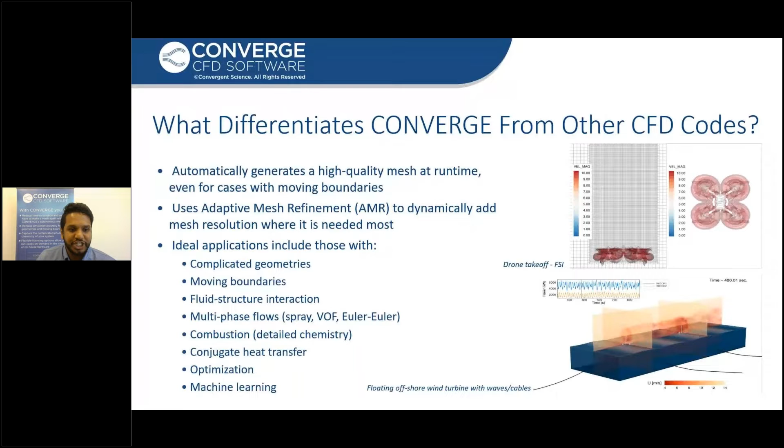This is typically the workflow that you would encounter in some of the traditional CFD codes out there. You would import your geometry, and before you can really focus on the physics of the problem, you would have that bottleneck of meshing, either through a mesher or even using another software for meshing. And that is what we offer to get you around in CONVERGE. So you would simply import the geometry, and with automatic mesh generation, you can have more time to focus on the physics of the problem.

So how can this help you? Well, you can avoid long meshing times. You don't have to mesh by guessing anymore. That's what AMR is really there to help you with. With AMR, you can simply have mesh applied where the flow gradients are most varied.

If you want to do a grid convergence study in CONVERGE through the Cartesian cut-cell method, you can simply change the base grid, as we call it, and have a new mesh generated, which makes grid convergence studies much easier. And also, we have a higher quality mesh through the orthogonal cells that we use.

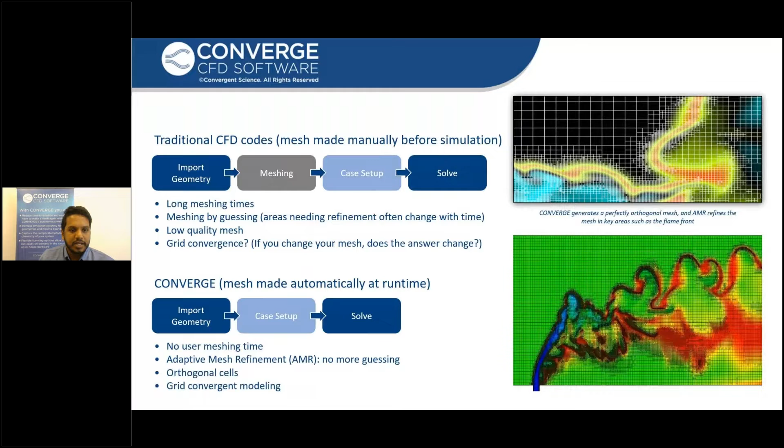So that's an overview of CONVERGE, but for this webinar specifically, we wanted to focus on some case studies that we encounter in the oil and gas offshore market. Firstly, multi-phase. Multi-phase flows are something we encounter daily in the oil and gas market. Whether it be upstream, midstream, or downstream, there's always a multi-phase application of interest. You're going to hear a little bit about the multi-fluid multi-phase model, and also applications such as the three-phase oil separator and the fluidized bed reactor.

Another is going to be the floating offshore wind platform and some of the models we have specifically for that. We're going to look at the OC6 validation effort, a case that we simulated in this area. Pumps and compressors is an area we've been in for the last decade, and we're going to look at one specific case of a pump where fluid structure interaction and automatic mesh generation really come into play. Erosion modeling is what we're going to look at finally, with cases in erosion in pipe flow and drill bit modeling.

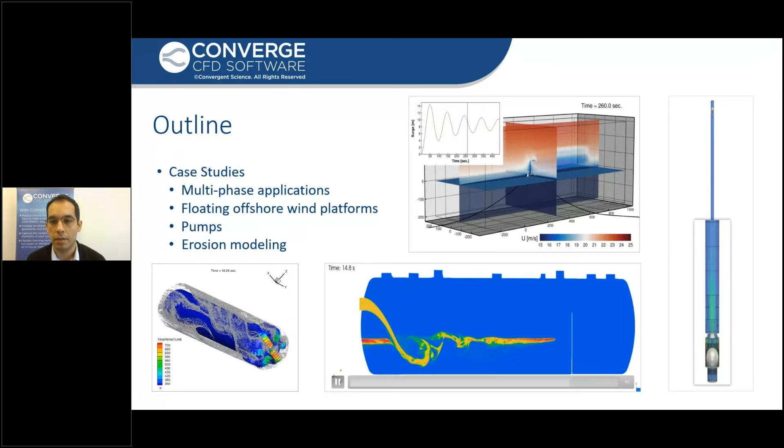In this webinar, we'll be discussing some main features that can be useful in oil and gas applications. The first part of this webinar is about the Eulerian multi-phase models that we have in CONVERGE CFD. There are many other industries interested in this type of problem. For example, technology, aerospace, automotive, and even biomedical industries are among them.

The figure here shows how Eulerian and Lagrangian approaches are different. As we may know, in Eulerian approaches, we solve the flow field in discretized control volumes instead of tracking individual parcels. And two main Eulerian multi-phase models, which are available in CONVERGE, are volume of fluid, VOF, and multi-fluid, multi-field, or MFMF models. CONVERGE can directly transport the void fraction or transport species, momentum, and energy, and calculate the void fraction or species volume fractions.

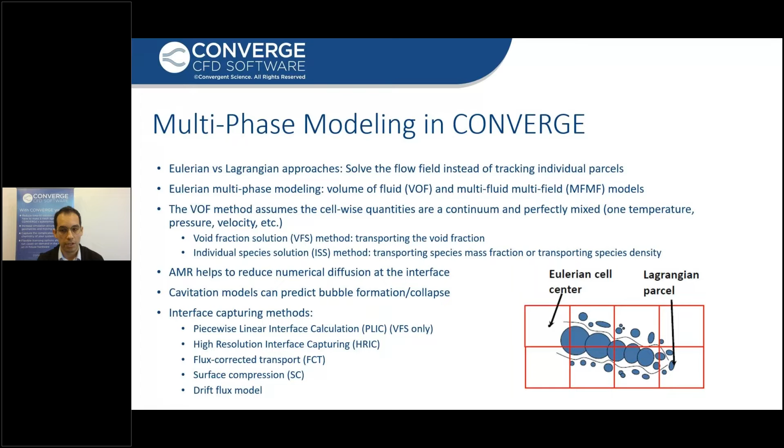Transport equation for species can be solved by transporting species mass fraction or transporting species density. And you can choose between the two. Using adaptive mesh refinement with front capturing techniques in CONVERGE, you can capture sharp interface between the two species or each species pair. And the interface capturing models that we have available in CONVERGE are PLIC, HRIC, FCT, surface compression, and drift flux model.

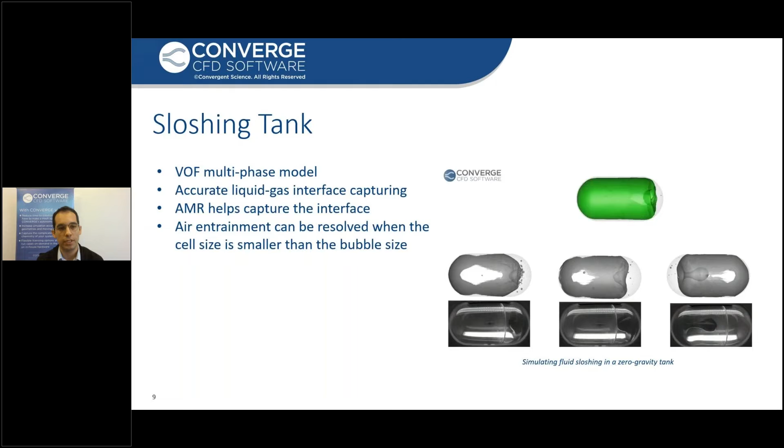In this video, a tank at zero gravitational force is moving back and forth in alternating directions. And you can see how the liquid in green starts from a resting position and reacts to the motion. And later on, you see the formation of bubble. The VOF model in CONVERGE is used for this simulation, and we compare the results to the experiment that was performed in the International Space Station. And as we can see, CONVERGE is able to accurately represent the liquid motion and bubble formation.

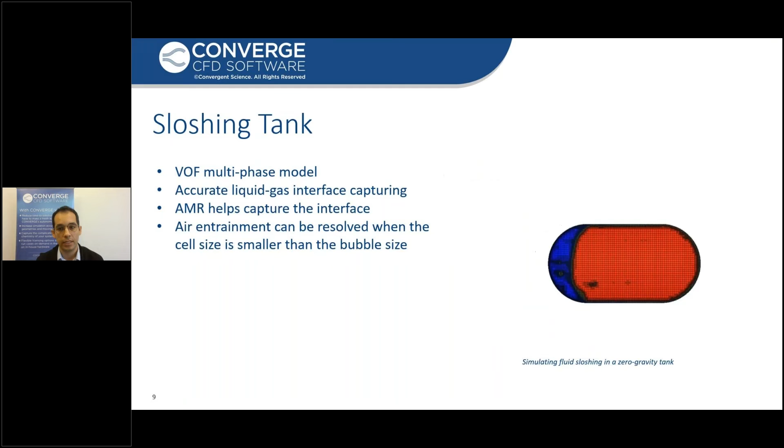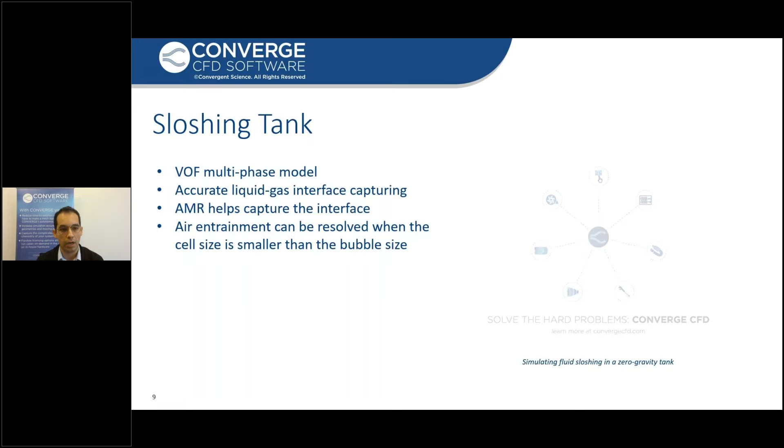And here you can see the AMR, how it refines the mesh automatically at the free surface. So today, in general, we'll go over multiple examples of AMR application, and we'll show how we can save time using that feature.

Multi-fluid, multi-field, or MFMF model allows for modeling of multiple immiscible species. Dispersed phases can be solid, liquid droplets, or bubble gases. In MFMF modeling, continuity and momentum and energy equations are solved for each species individually. And generally, VOF is the preferred choice for free surface flows like sloshing in a tank, free surface in a wave, filling and emptying of a tank, because we are only interested in the location and motion of the interface between the two species or two phases.

But when it comes to including dispersed phase in our analysis, such as sediment transport, MFMF is more useful. Using MFMF, dispersed phase is transported along with the continuous phase using particle stress models that we have in our code. It's clear that discrete element model can be really expensive for those engineering analyses, although it can be more accurate.

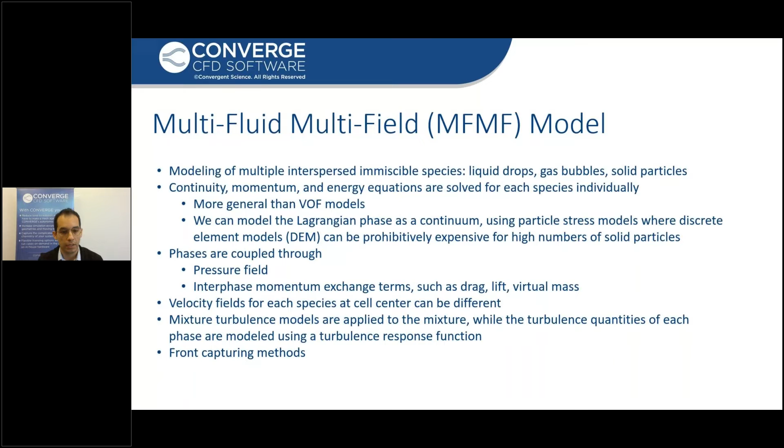So the first example that we're going to talk about is fluidized bed, which is an example of continuous dispersed phase interaction. Here we show a schematic of 2D bubbling fluidized bed. As you can see, lower part of the domain is filled with Geldart group B particles with volume fraction of 54%. Uniform flow of carbon dioxide is fed from the bottom of the domain. You can see how it suspends the bed.

And we account for particle collisions using particle stress models, and volume fraction contours for both particle stress models that we have used, I mean, the kinetic theory and granular rheology, show similar behavior in terms of capturing the bed expansion. And based on these contours, we can confirm that both models capture how gas flow impedes bed overpacking.

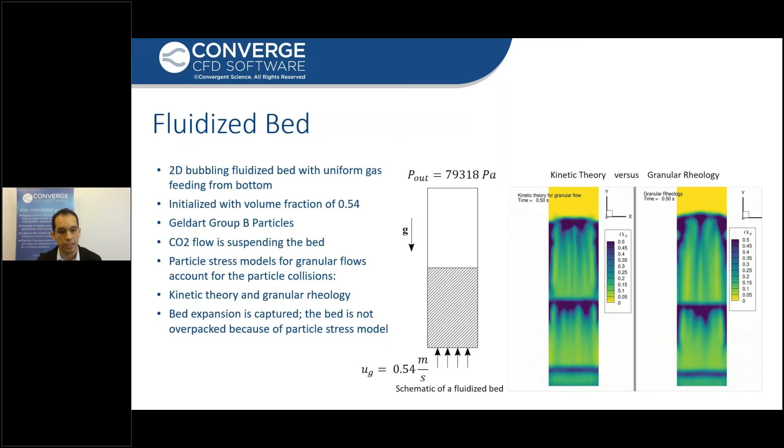The next test case is slug flow in an infinite horizontal pipe. Case properties are listed here, and we can see how flow is driven by a constant velocity source term in the streamwise momentum equation. The species mass fractions are specified in the initial field, and we use the MFMF model to simulate the multi-phase interactions in the pipe.

On the right, we show the MFMF user interface in our software. We include the drag between the species by the Schiller-Naumann model. We have the option to customize the particle diameter for each species pair, or apply a global quantity for all the pairs in order to calculate the drag coefficient. We can also include other interspecies forces such as lift and also added mass or virtual mass.

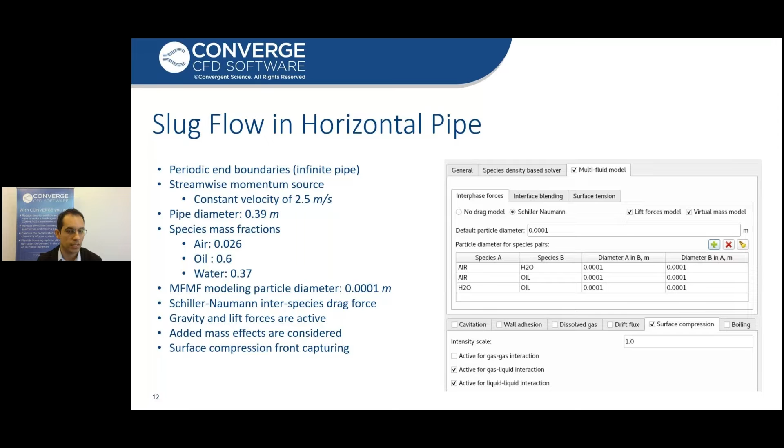Because generally, if we want to simulate a particle which is accelerated by different forces in the momentum equation, we need to account for the virtual mass effect. Also, to capture the sharp interface, we use a surface compression technique, which is a pure numerical technique.

Here we show contours of mass fraction for oil, water and air for two types of initialization: homogeneous on the top and slug on the bottom. Evolution of continuous stratification, which is driven by interphase forces, and growth of hydrodynamic instabilities are captured. If we compare the final response here, both converge to the same result. This shows the effectiveness of the MFMF model for the phase interaction.

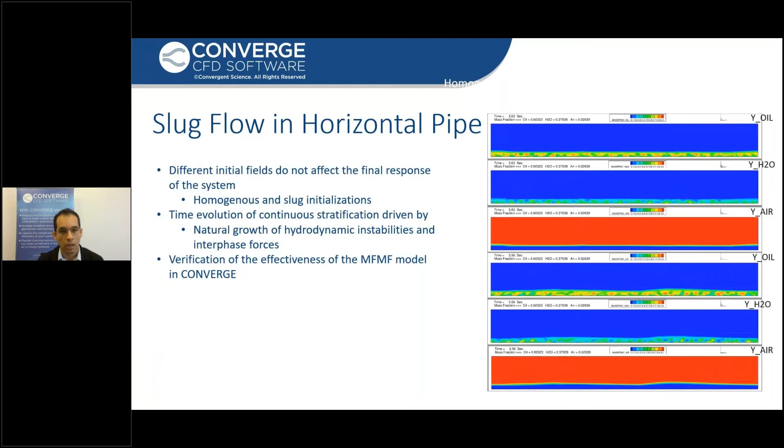Next, we study an air, oil, water separator. The figure on the right shows a 3D schematic of the domain. This is a 3D three-phase simulation where we use the MFMF multi-phase model. We prescribe inlet mass flow rates and outlet pressures for individual species.

In terms of the CFD solver, we use SIMPLE for the pressure velocity coupling. The mixture turbulence model is based on the standard k-epsilon model, and a collocated mesh with a base grid size of 80 millimeters is used. Species and velocity-based AMR are also used for the adaptive refinement.

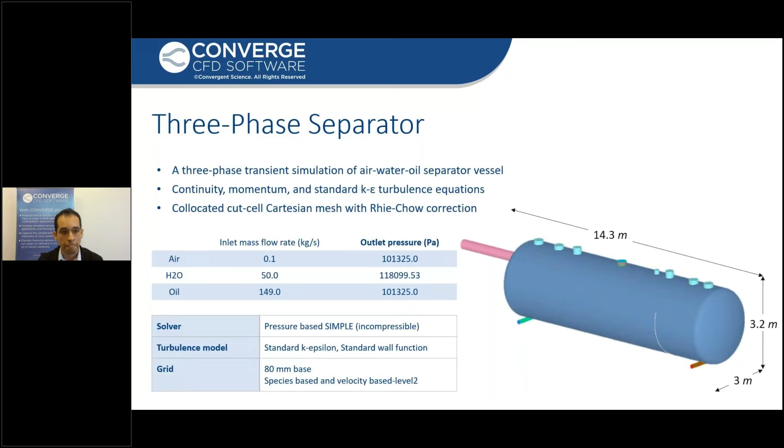Here we show contours of oil, water, and air mass fractions. This type of simulation can help investigate the efficiency of separators. We can see that the difference in separation rate for each species pair is captured by MFMF modeling in CONVERGE. The contours show that because of the density gradients, water, which is the dense fluid, remains at the bottom. We have oil, which sits on top.

It reaches the oil bucket and finally leaves the tank. So if I forward the video, we can see how eventually oil leaves the tank. AMR with surface compression did a great job with the sharp interface between phases. This is a fine resolution case with a total cell count of 7 million, and it costs around 27,000 core hours for 180 seconds of physical time.

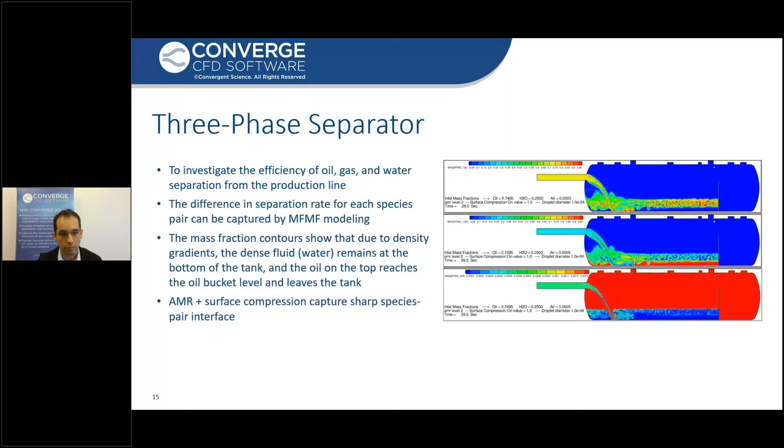The second part of today's webinar is about floating offshore wind platforms. Floating offshore wind turbine designs are generally challenging because there are a lot of physics involved: wind and wave loads, cable dynamics, and structural responses to loads. Also, disparity of length and time scales, as shown on the bottom right, adds to the complexity of flow resolved simulations. Simplified engineering models may not be sufficient to model all those phenomena, so we need to use higher fidelity approaches.

At Convergent Science, we have been investigating a coupled simulation strategy to simulate these types of flows efficiently. On the top right, we show a semi-submersible floating offshore wind turbine that is suspended in water and held in place by mooring cables. The first thing I want to focus on is the cut cell approach and autonomous meshing. That is a huge advantage for complex moving boundaries, and we are able to easily handle mesh generation and mesh motion in CONVERGE. In order to save computational cost, the blades can be modeled using suitable rotor models.

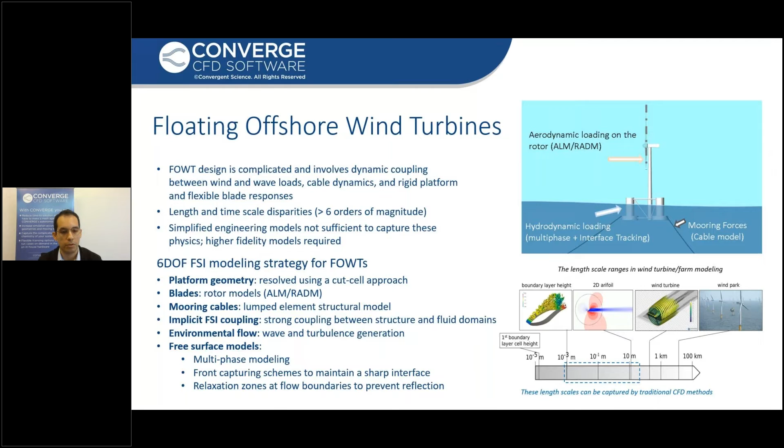We have already presented the results for OC4 in the past, and here we will present OC6. OC6 stands for the Offshore Code Comparison Collaboration Continued with Correlation and Uncertainty. It is an international research project on validating the tools for the design of offshore wind systems. It is run under the International Energy Agency. Specifically, phase 4 of OC6 addresses viscous hydrodynamic loads for floating offshore platform structures.

On the right, we show a full scale next to a scale model of the 3.6 megawatt Siemens turbine and its TetraSpar platform. In the support structure in the middle, the hull and keel move together as a solid entity, and there is no relative motion between them. Dimensions of the support parts are also listed in the table.

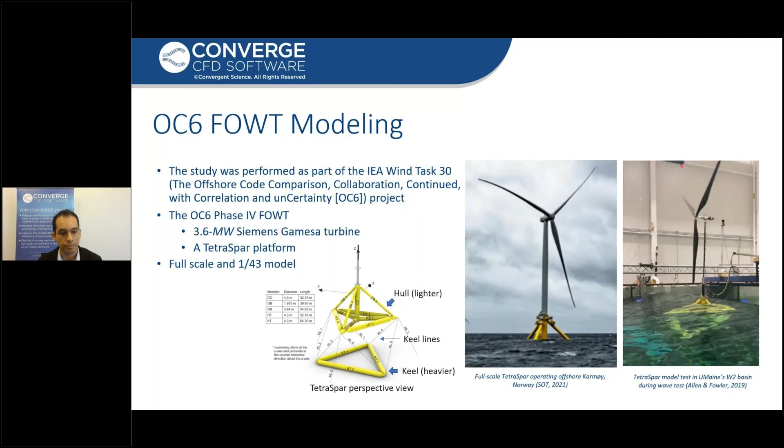The mooring system contains 3 mooring lines at 2 levels, lower section and upper section. There are additional anchors in the smaller test system compared to the full-scale offshore platform. The first one is 2 yaw bridle lines that are used only for certain extreme conditions that are not studied here. And that's why we haven't included that in our CFD simulations.

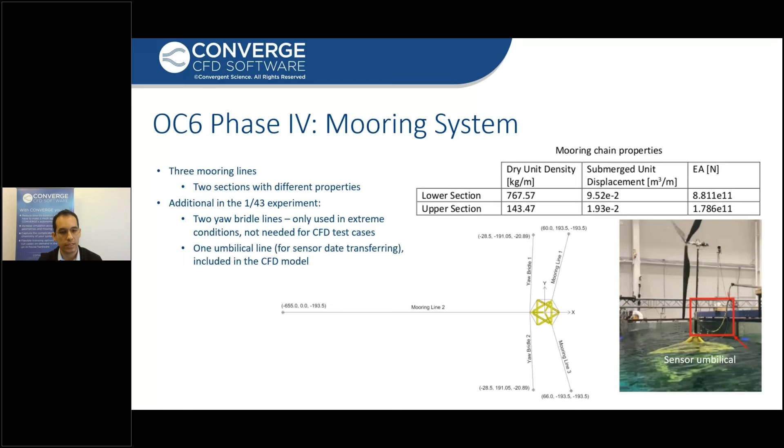And one umbilical line, which is for data transferring from the platform to the acquisition system. This part is actually included in the CFD simulation. Here, we have the details of the case setup in terms of the solver type, numerical scheme, grid strategy. We can clearly see how AMR creates finer mesh at the interface, air-water interface.

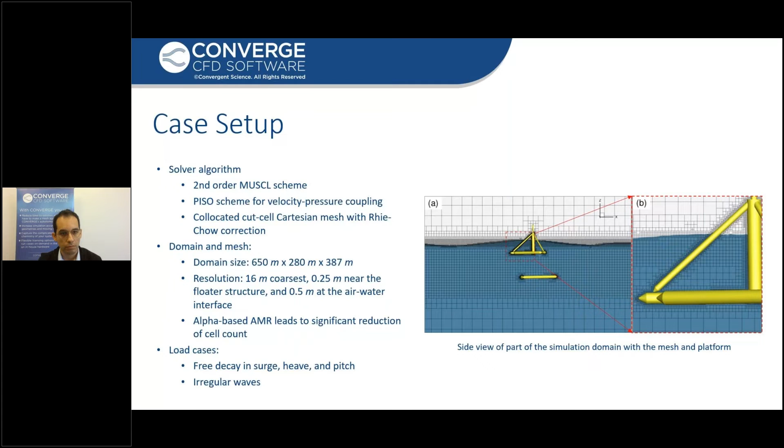In this section of this webinar, we will present results for 2 types of loading, free decay and induced motion by irregular waves. All right, for the OC6, we already know the equilibrium state. So to simulate the free decay, the only thing we can do is to displace the whole platform from its equilibrium state and see how it reacts to that displacement. And here we are showing the amount of displacement in all 3 heave, surge, and pitch directions. This animation on the right shows the heave decay.

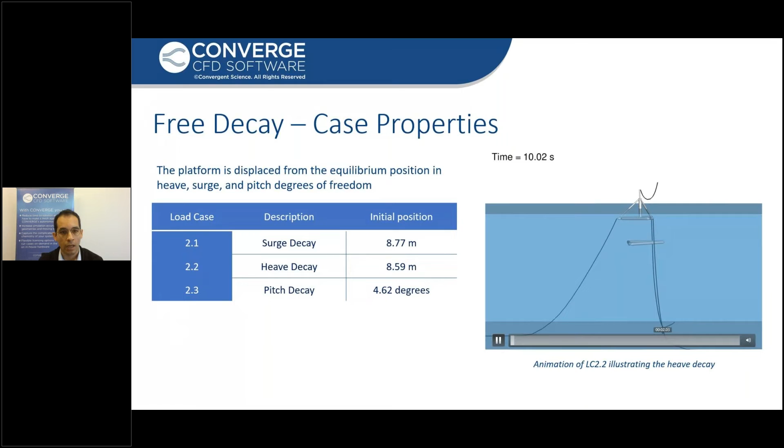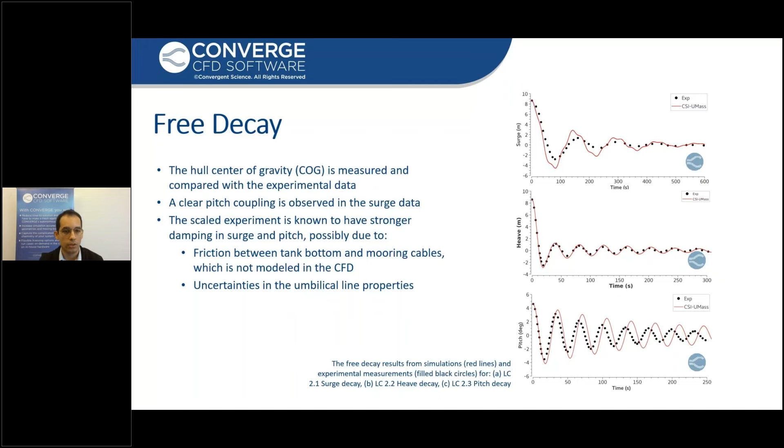We have three animations at the bottom here, which show the 6 degree of freedom motion. For this type of simulations, we have around 0.6 million cells, and the total cost is around 800 core hours for 600 seconds physical time.

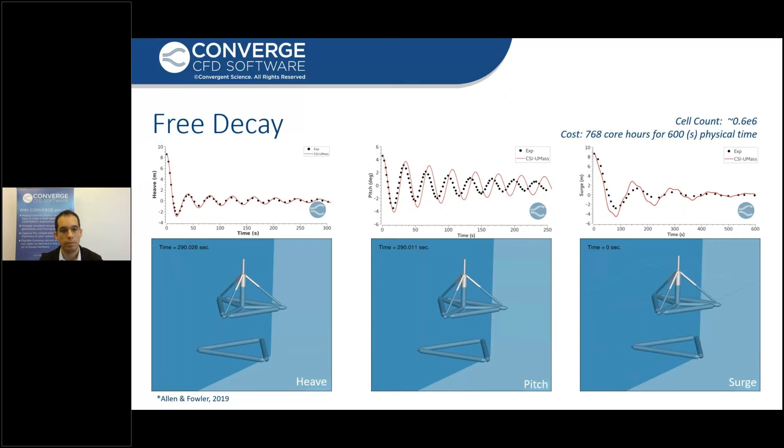And the next loading type is the irregular wave. Instead of displacing the platform from its equilibrium state, here we apply irregular waves at the inlet. And then we measure the movement of the floater. So we have a time series data, then we can do FFT to convert them from time domain to frequency domain. This way we can analyze the power spectral density of different modes of motion in frequency domain and compare them to experimental data.

If we take a close look at the system response, we can recognize two peaks for each mode, right? The one with lower frequency and one with higher frequency. The lower frequency one corresponds to the natural frequency of the platform, and the higher frequency to the wave excitement. But again, the overall agreement is reasonable compared to the experimental data.

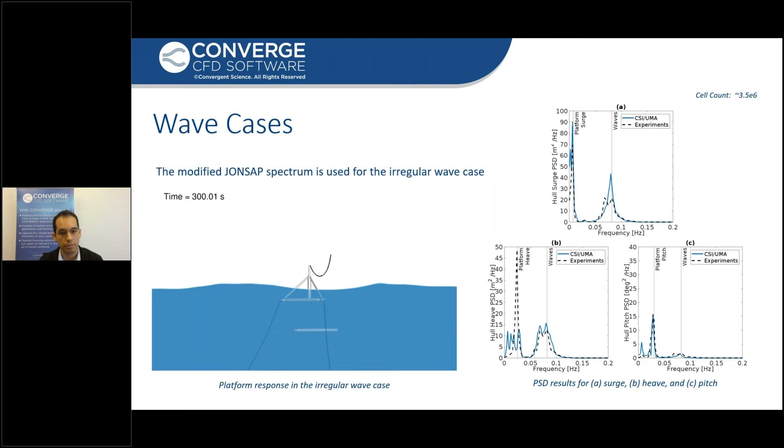Okay, the third part is about fluid-induced valve motion in a positive displacement piston pump. For this study, we employ FSI modeling together with compressible liquid to simulate the system. All right. I'm going to start with an animation from CONVERGE Studio. This animation describes the case.

In CONVERGE Studio, once the case setup is complete, you can create an animation of the moving geometry, right? This is done before you even start the CFD simulation. And it allows you to check how the geometry is moving and to make sure the motion is consistent with your real problem. In CONVERGE, moving geometry cases are really easy to set up. And the piston pump case, for example, here is a multi-physics simulation. We use different physical models to simulate the problem.

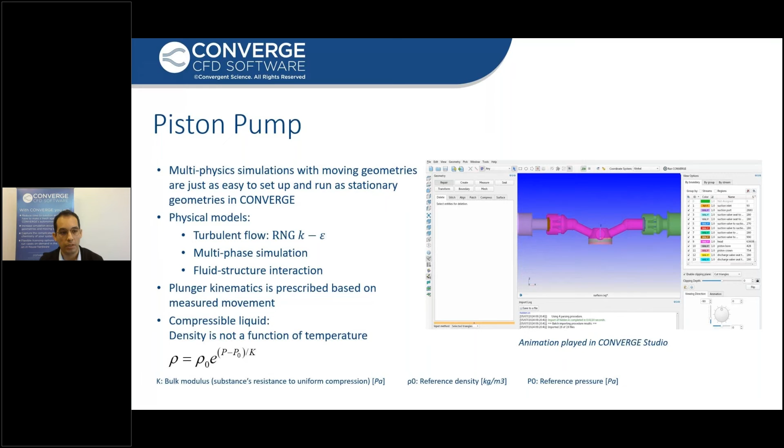The flow field is turbulent, which is modeled by RNG k-epsilon. Flow is induced by some oscillatory plunger in the piston, and the plunger itself has some time variable stroke profile. And the working cycle consists of suction and discharge. Bottom dead center is where the discharge cycle starts, and suction starts at the top dead center. And the compressible working fluid is described by equation of state, where we can see density is a function of pressure. And the system properties are listed here in this table, for example, the fluid is water.

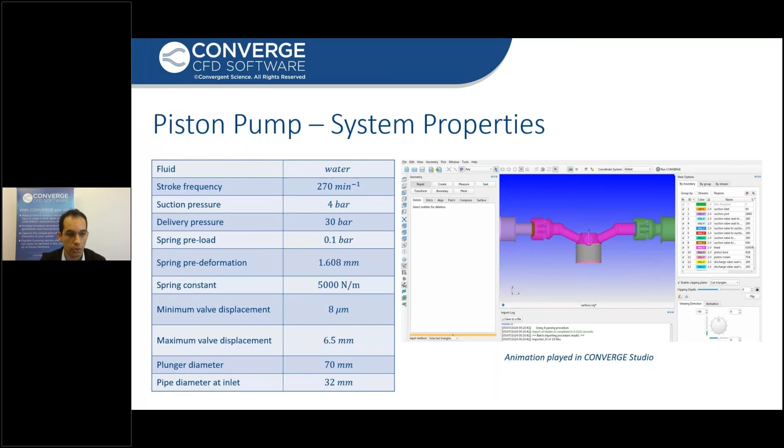We know the stroke frequency, which is 270 RPM. The suction and discharge pressures are known. The spring preload is known. We know the spring constant, so we can apply the pre-deformation of the spring based on those two values based on Hooke's law. And the minimum and maximum valve displacements are also known, and the system characteristics are listed here.

All right, so as I mentioned, piston pump is a positive displacement pump. The pump is separated from the suction and discharge lines by some plate valves, and the valves are actuated by some fluid forces. And we don't have any active control system. The animation on the right shows how the suction valve moves back and forth based on the balance of forces on the valve. This is done by two-way FSI coupling. And here we show that on the verge of opening, fluid forces and suction pressure should be balanced by the spring pre and post loads.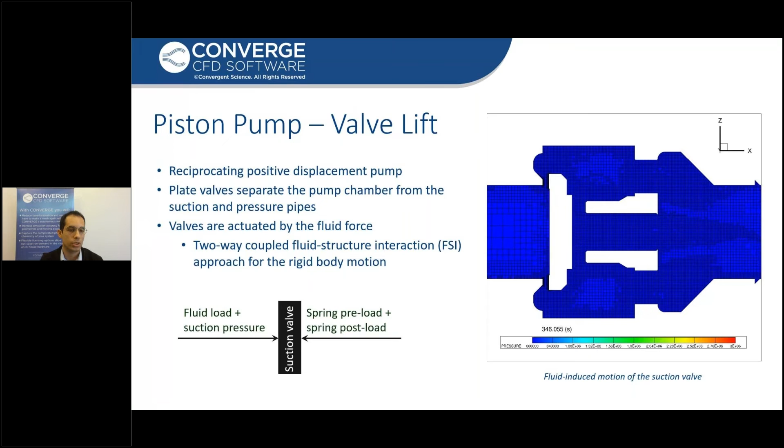And here we compare the suction valve lift with test data. In the plot, you can see both opening and closing of the valve is matching the data. So it confirms that not only the displaced volume has been captured correctly, the compressibility effects are also captured by

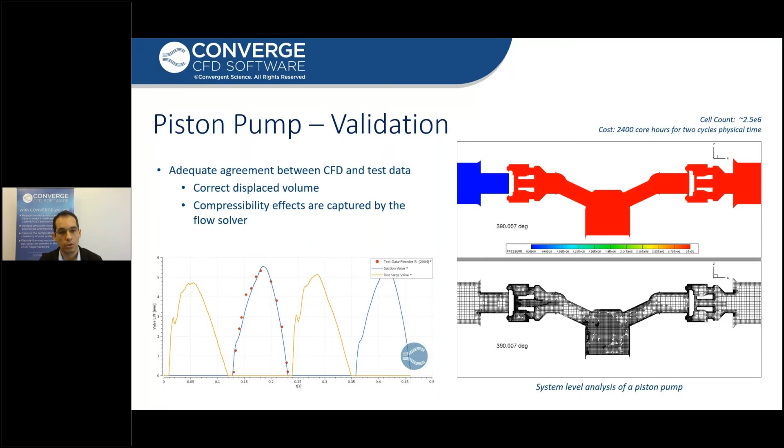a CFD solver. The animation on the right shows contour of pressure over two physical cycles. Also, we can see clearly how AMR dynamically increases the grid refinement wherever and whenever needed. The total cell count is around 2.5 million for this simulation, and the computational cost is around 2,400 core hours for 2 cycles.

The last section of today's webinar is about the erosion modeling. We'll discuss how it can be used with other physical models in Converge for multi-physics simulations. Let me briefly describe the erosion model in Converge first. Solid parcels and erosion modeling can be used to capture the erosive effect of a solid particle that impinges on a surface. With this model, the surface geometry in the CFD simulation doesn't change. It remains unchanged, and we do not update the surface representation.

Erosion is computed by some empirical correlation for the erosion rate. That's the ratio of eroded mass to impinged mass. We show the validation results on the top right, and on the bottom, we see the advection of the solid parcels by the flow, and we show contours of erosion ratio, eroded mass, and impinged mass over the wall surface.

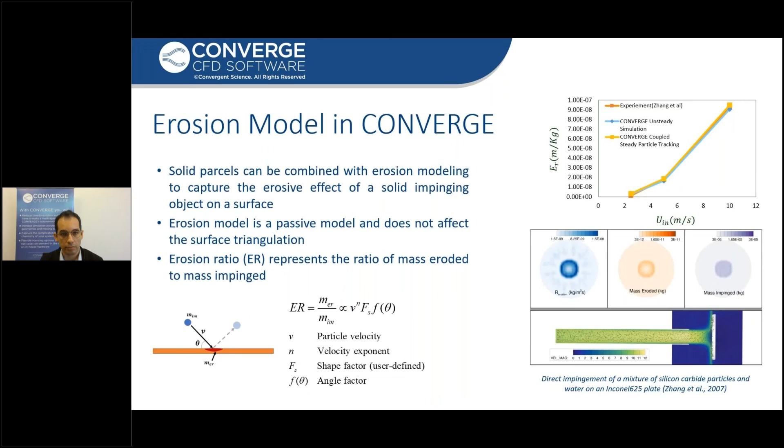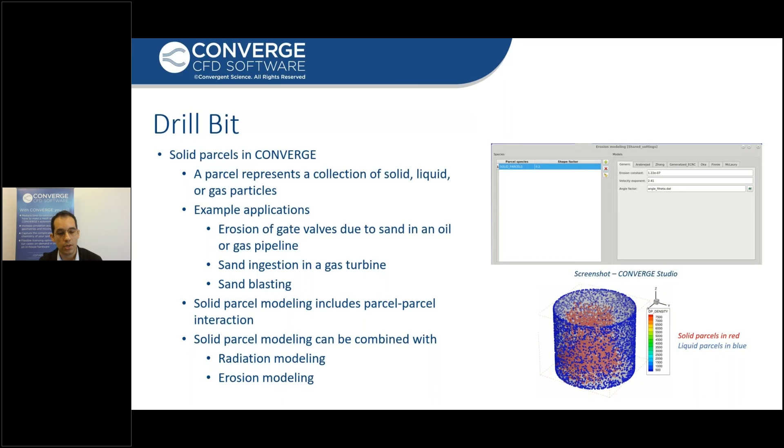All right, so in Converge, a parcel represents a collection of solid, liquid, or even gas particles. Solid parcel modeling includes parcel-parcel interaction that can be combined with radiation modeling and erosion modeling. On the right, we show the erosion modeling panel in Converge Studio, where we have different erosion models available. And at the bottom, you see the liquid and solid parcels in a tank.

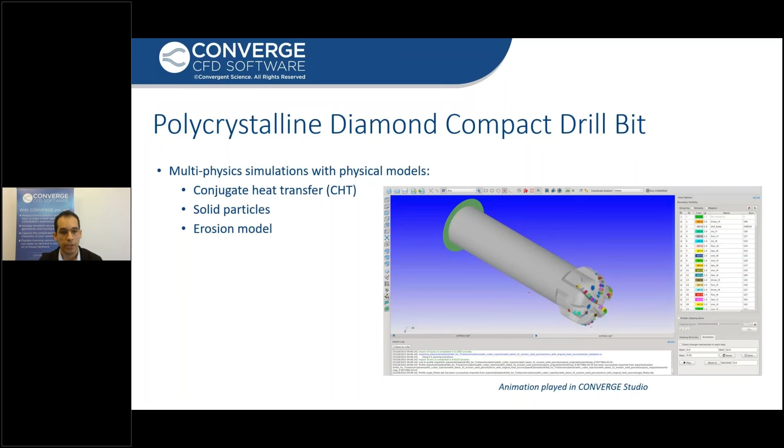Here we show a polycrystalline diamond compact drill bit case setup in Converge. This is again a multi-physics simulation with complex moving geometry. Heat diffusion through cutters and bit wall can be accounted for by conjugate heat transfer setup. Generally, the cutting process creates some solid parcels, and impact of those pieces onto the bit wall causes some erosion in the long run. And here we want to make those types of predictions.

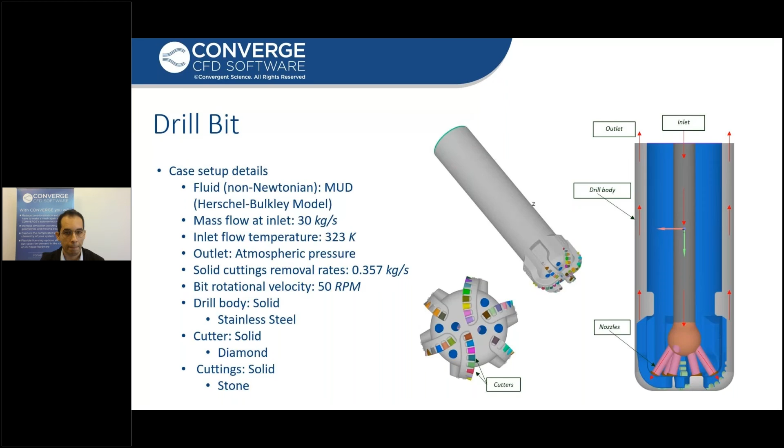We have the details of the case setup, and we show some screenshots of the geometry from different angles. The fluid is modeled by the Herschel-Bulkley non-Newtonian model, the drill bit rotates with 50 RPM, and we impose mass flow rate at the inlet and constant pressure at the exit of the domain. So when the erosion model is enabled, it can be combined with CHT and solid parcels to make some predictions. First, the mass that impinges on the bit wall can be predicted. The temperature of the bit wall itself can also be predicted.

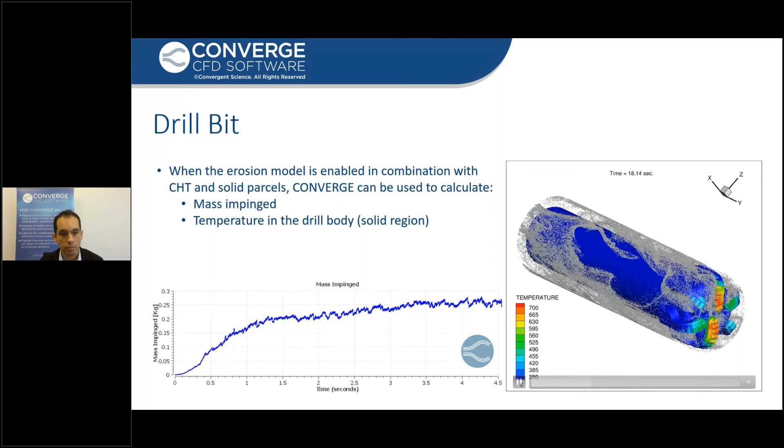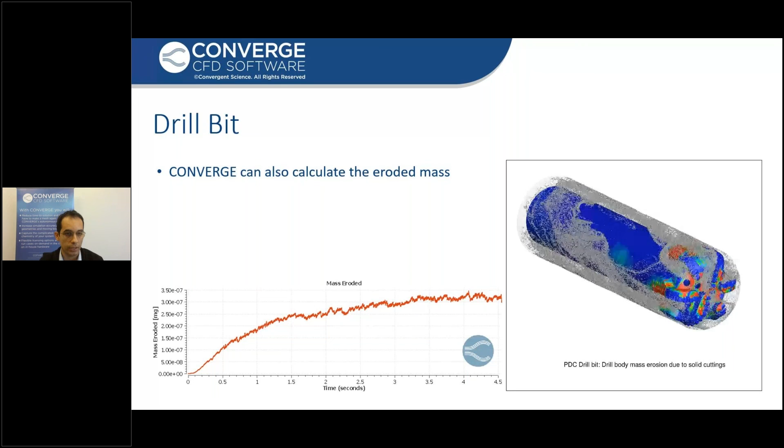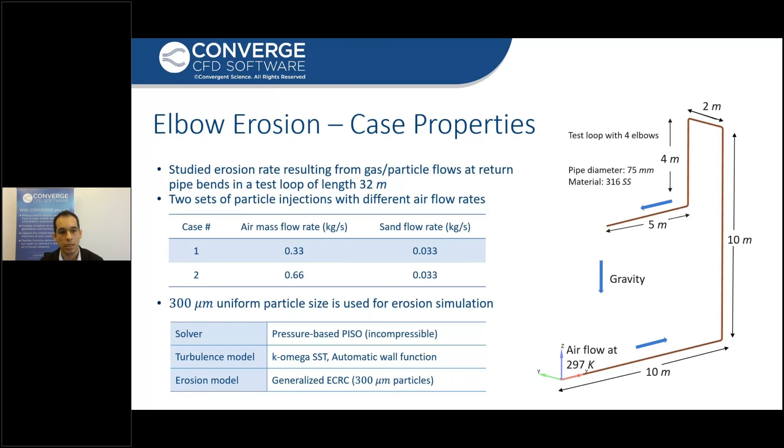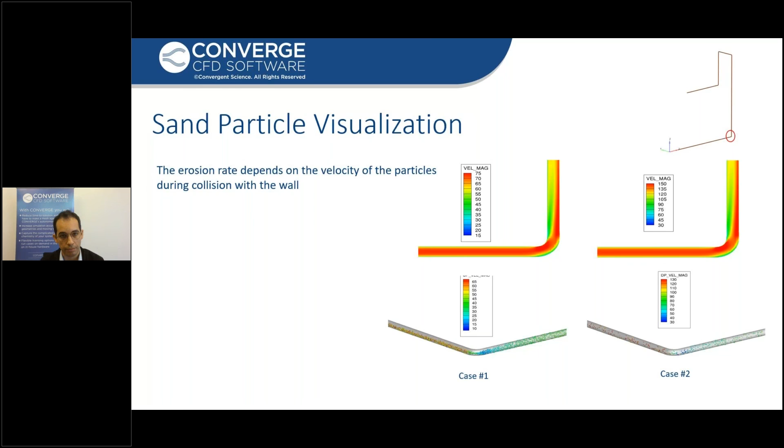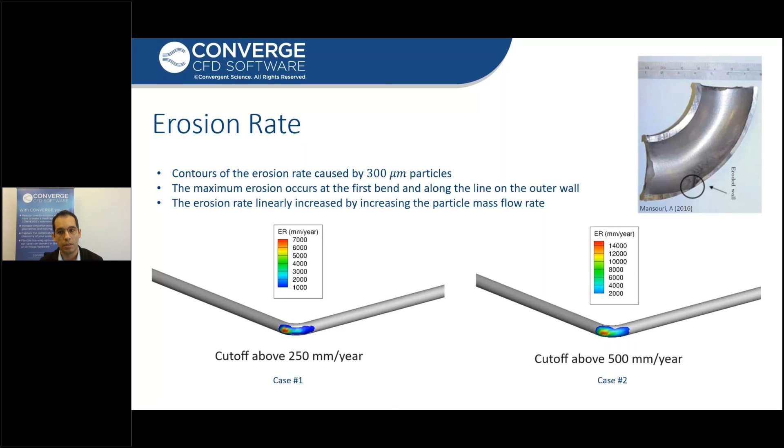And if we take a look at the erosion rate contour, it confirms that the maximum erosion occurs at the first bend and along the outer wall. And qualitative comparison to the test data confirms that the location of maximum erosion is right. And it can be seen that with doubling mass flow rate, the erosion rate scales almost linearly.